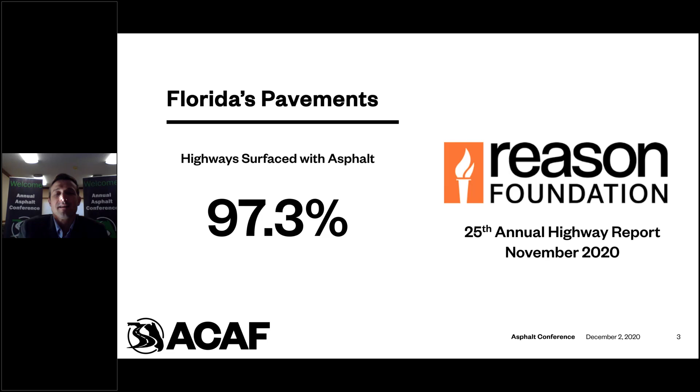The quality of our pavements, as we know, is good, but what's interesting is it's continuing to get better. I've sat down with the department and we've looked at data for the past several years, and the smoothness data continues to get smoother. The densities are getting better. So across the board, Florida's doing better.

The association for the past 40-something years has given out statewide pavement awards. This year, we got more applications than ever before. The application process for these awards is not easy. There's like a 10-page PDF you have to fill out perfectly. You have to do a lot of work and pay a sizable application fee. So to apply for this, you have to be fairly certain that your pavement's going to win.

That being said, we did look at the data, and this was by far the most competitive year we've had. A lot of the pavements that honestly didn't even make the final round of judgment would have won the statewide award in previous years.

Every year we give 3 statewide awards, and winning one of these is a huge accomplishment. The first one is for rural resurfacing. This is for state primary highway or rural county highway pavements. You have to have at least 10,000 tons or an equivalent measure. And to be a rural resurfacing project, 51% of the project needs to have paved shoulders.

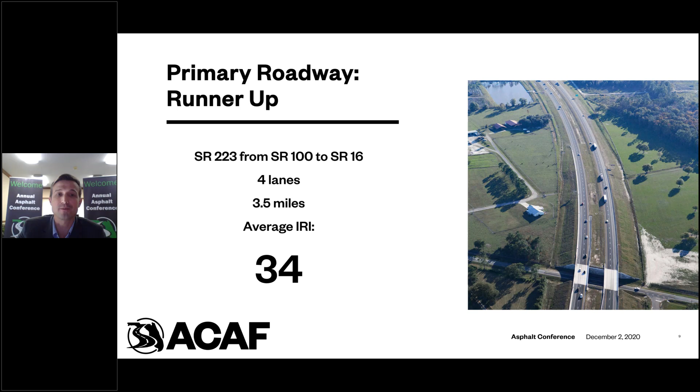Our runner-up in this category, and their picture is already on the screen, so hopefully some of you already know this is y'all. This was State Road 223 from State Road 100 to State Road 16, with an average IRI of 34. Anderson, Columbia, the powerhouse of North Florida, an IRI of 34 is really remarkable, so well done, Anderson.

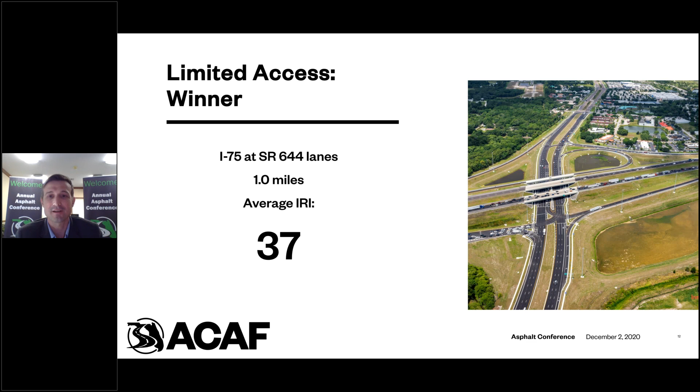And our limited access winner, I think this is a fairly recognizable picture for most of y'all in the audience. It's I-75 at State Road 64. It was 1 mile and 4 lanes with an average IRI of 37. So barely eclipsing Ranger, but it was our dear friends at Ajax Paving.

Anderson, Preferred, Ajax, and Ranger. Building smooth pavements helps the Florida asphalt industry, and that helps me personally. So thank you very much for the great work y'all have done.

One more award, and this award is different. It's not given out by the association, normally we physically give it out. It's awarded by the Asphalt Pavement Alliance, and it's for perpetual pavement.

Perpetual pavements to me are really remarkable feats of engineering from our asphalt engineers. Basically what they've done is they've taken these very difficult materials to control, rocks and binder and perhaps some additives, and arranged them in such a way that they can ensure that the distresses the pavement receives only happen in the top layers. So when you do have a crack, it's easy to mill off and replace.

And thus the pavement lasts forever. Asphalt is the only pavement that has this ability to be built for a perpetual life cycle, and it's a huge advantage to us in the industry and also to owners of the pavements.

This award is really tough to win. I will say Florida has won it 10 years in a row. The FDOT has to send a detailed application to the Asphalt Pavement Alliance. The project can't have any structural failures for the last 35 years and no more than 4 inches of overlay.

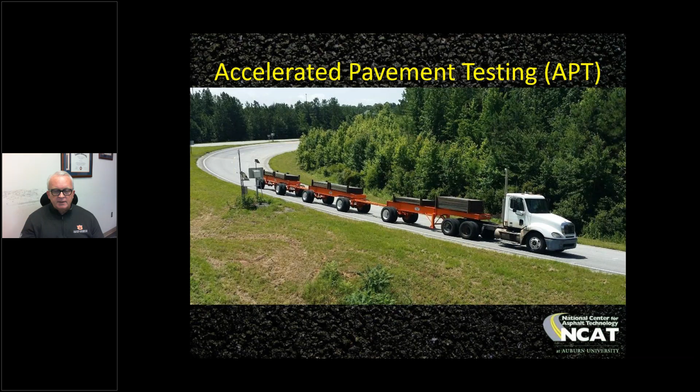We want as much equivalent single axle loading, realistic load level damage as we can get. So everything but the steer axles on that truck are loaded up to, but not beyond the federal limit. That gives us a gross weight that's about twice the legal limit, but we don't care about that.

That's a picture of the east curve of the track, where Florida has some test sections that are beyond the scope of the discussion today, but that research is ongoing in this cycle. We run 5 of these trucks at a time, so we run 2 shifts of drivers.

Each driver's goal is to run 200 laps. So each one of those 5 trucks does 400 laps a day, and we do that 5 days a week here. This is our type of accelerated pavement testing. It's a high-speed load event because it's an interstate simulation, and we use legal loads.

Now, we do research here. Florida DOT has been one of our sponsors going all the way back to the first research cycle here. And the research that we do at our track is essentially the high-speed, full-scale legal load companion testing that is, in many cases, done with the HVS test program that is run in Gainesville.

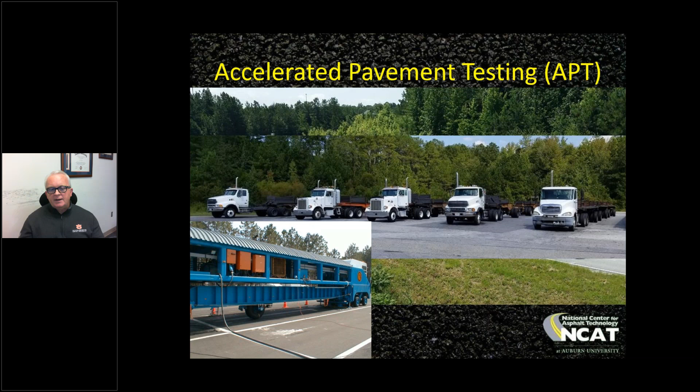So if you're curious about how it all fits together, we do our research in collaboration with the accelerated testing of a different type, that's the slower speed variety, typically a higher load variety, but the results are often compared to each other in order to provide the most value for the Florida Department of Transportation. Florida's actually been, as I said, one of our inaugural research partners here.

Florida's been very involved in the NCAT pavement test track, going all the way back to the planning stages in the late 1990s. So we very much appreciate and respect the relationship that we have with FDOT, and especially the practical aspect of the research program and the technical support that we are often blessed to be able to provide to our friends at FDOT.

Many of the northern states have joined in partnership with Florida because of a formal partnership that we have with Minnesota DOT in order to tap into the Minnesota Road Research Project. So a lot of the test sections that we build here at this facility, we build the same test sections now in offset years up in Minnesota. So we have the hot weather fatigue cracking test sections typically down here, and then we've got the cold climate thermal cracking, aggressive thermal cracking test sections that we also build in Minnesota.

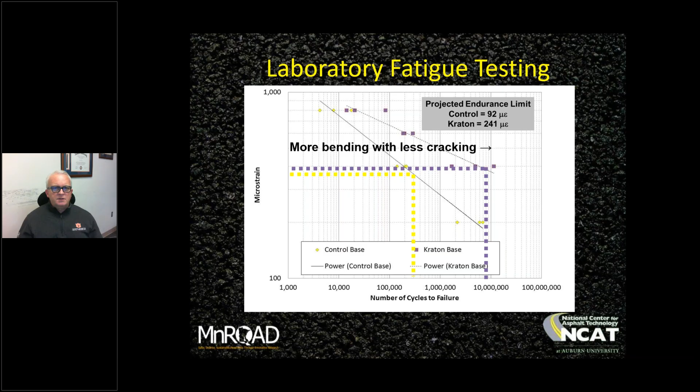So in the lab testing portion of this study, we knew we really had a winner in this material, and it was going to be extremely crack resistant as we installed it on the track.

So tremendous improvement in fatigue cracking performance, to the point where we were never able to fail the HiMA section on the track, even though it was 5 3/4 inches thick. We really think it had the potential to be a perpetual pavement had we left it on the track and studied it with enough ESALs, enough research cycles to prove that. It was on the track for 2 research cycles, and it never failed and never had any substantial distresses. So outstanding performance with HiMA binder.

What that translates to, very conservatively viewed, since we didn't fail the HiMA test section, is a layer coefficient at least 43% higher than the control section in this study compared to conventional hot mix asphalt. What that equates to, if you look at the differences in thicknesses, is 1 inch of HiMA mix is approximately equal to about 1 3/8 inches of conventional hot mix asphalt, with conventional, say, 7622 polymer modified binder as opposed to the highly polymer modified binder.

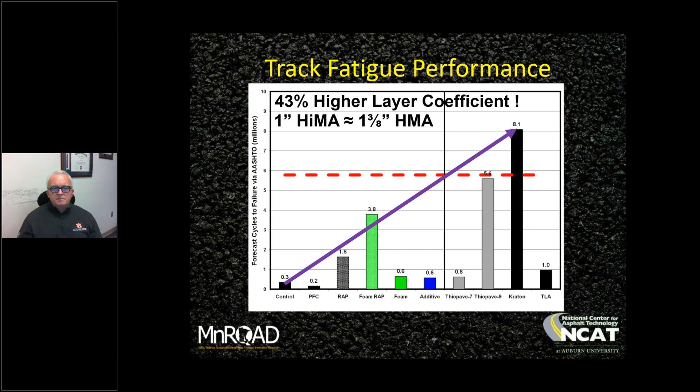So you get a huge benefit when you use these - at the time, this was a very innovative material.

When we saw that performance at 5 3/4 inches, we subsequently had another section on the track. On the far left, you see 10 inches of hot mix asphalt on top of a weak foundation, a simulation for Oklahoma. This was an Oklahoma test section, and at 10 inches that's not a perpetual pavement because the subgrade was so weak - highly plastic, very high PI type of material - and it actually started failing after about 8.5 million ESALs.

We did a conventional rehabilitation of that, and for the next research cycle - 3 inches of dense graded under 2 inches of SMA with a paving fabric in between - it failed again about 1/3 of the way through the research cycle.

So we had these HiMA study results that looked outstanding, looked perpetual, at 5 3/4 inches. We thought, let's try a mill and inlay of that buildup with a little tweak, taking the surface mix and building it as a rich bottom. We had a surface mix sandwich with 2% air voids at the bottom, and a base binder mix in the middle. We did a 5 3/4 inch inlay, and essentially floated a perpetual pavement on top of a completely failed pavement that had not previously survived, with a 5-inch mill and inlay with an SMA surface mix.

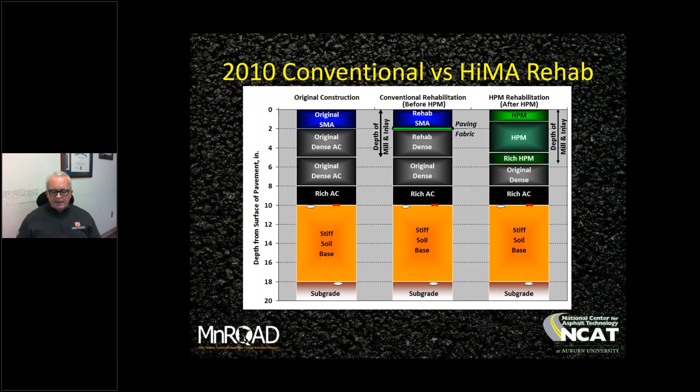That study was so successful that Oklahoma actually implemented this, and now it's been done numerous times on their network with great success. Because of the pooled fund research cooperative nature of our experiment, states started to pay attention when we saw that perpetual performance, and then saw that we salvaged a failed pavement with it.

So Alabama came to us and said, hey, do you think this HiMA binder would work here? The 2 big advantages you get from HiMA binder mixes are improved cracking performance and improved rutting performance, because of the elastic recovery potential that the mix has.

So we did a forensic study out at the project, looked at all their data, and said, you know what, we think this could work really well. Turned out to be an interesting project for Alabama. They did it as a night job because of the extreme traffic on this route. This was the first HiMA binder project in Alabama, way back in 2012.

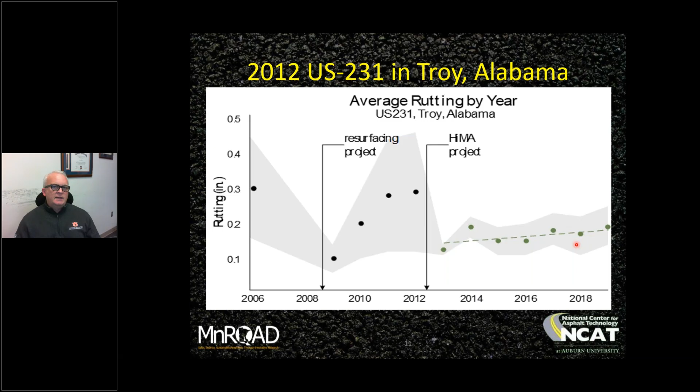As you can see, they're extremely pleased with the performance they've gotten from this HiMA mix that we put on US 231 in Troy on this project. Performance has been outstanding. If you want to learn more, you can look that up at ncat.us in our newsletter and download it.

So fast forward to the Green Group experiment on the track. It was also in 2012. We had 4 test sections in this experiment: a control section that was a relatively low RAP content mix, a ground tire rubber focused variant, a RAS focused variant, and a high RAP focused variant of the standard RAP control mix.

The idea was, can we use high percentages of reclaimed and recycled materials, consisting of RAP, RAS, and ground tire recycled rubber, to reduce construction costs and extend the life of the pavement.

The interesting thing about this is the high RAP focus section. I'm mentioning this because in the base layer, it had a 35% RAP dense graded mix design with HiMA binder. Up until this time, everything we'd done with HiMA had been with virgin mixes. Well, here we stepped out and said, okay, let's do something. We would allow in Alabama 35% RAP in a base and binder layer, so let's do that here.

But the problem was we had 35% RAP in the base with HiMA, 50% RAP in the intermediate layer, and then an SMA surface. So this 50% RAP intermediate layer was a relatively stiff layer because it had so much RAP in it, and we didn't use a softer binder or a recycling agent or anything. It was straight 6722 neat asphalt, so there wasn't a lot of rock interlock between the base layer and the binder layer in that buildup.

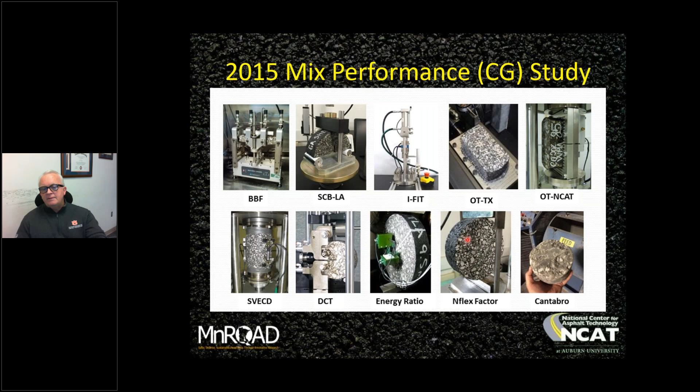Since we were building a bunch of sections, it was more like a regular road. When you throw weekends in there and then rain delays, we actually had some difficulty getting the binder out of our storage tank, and that was more like what a contractor could experience on a real project. So that's one of the things you have to be cautious about when you're engaging in work with this material. But we really believe in it and the performance of it, and we've used it again numerous times on the track.

That brings us up to 2018, and the state of South Carolina is funding research to do full depth rapid rebuilds. In their test section we went 8 inches, a little over 8 inches I think, in a single pass. And in their section, it was placed with conventional binder.

But to practice for that, we did 2 other test sections that we built with HiMA binder. We did 8 inches in a single pass with HiMA binder, and we had no trouble getting compaction, production handling, placement, compaction. We did cores so we could look at how density varied over depth, and density was great from the top to the bottom.

In the other 2 sections where we put thin lay surfaces on, those were a little over 7 inches, so not quite as deep as the section we did for South Carolina. South Carolina's idea with this research is: can we take an interstate that's completely failed and do a full depth rapid rebuild, in 1,000 and 2,000 foot pieces, without a big drop off and without having to do stage construction, so we can open it to full traffic the next morning. We've done that with diamond grinding for smoothness.

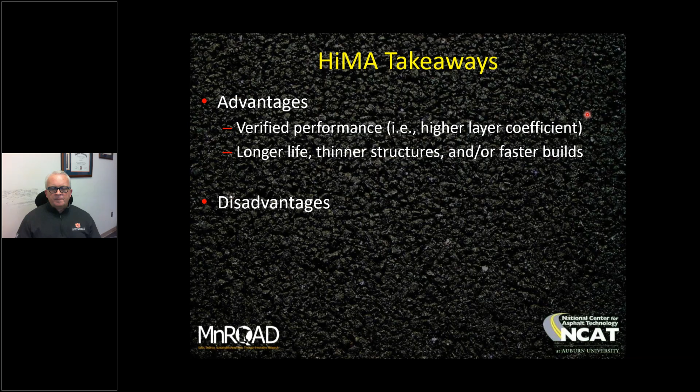On the advantages side, we've got verified performance. We've actually been able to calculate a higher layer coefficient and improve structural performance. That's outstanding. You get better rutting performance and better cracking performance, and we have that very well documented now. You get longer life, thinner structures, and or faster builds. There are a lot of advantages to getting the structural performance from 1 inch that would take 1 3/8 inches with other mix.

During production, construction, placement and compaction, it behaves similar to conventional polymer modified binder, as long as you respect the shelf life and storage temperature, and don't drag your feet during compaction, because when this stuff cools down and sets, you're not going to get any more density on it. But it's no different compacting than conventional 7622 up to that point.

On the disadvantages side, you do have limited time to use it after formulation. That's not delivery time—again, maybe you need to talk to your supplier, maybe there have been improvements in the chemistry, but the last time I used HiMA binder, I was essentially assured I had 5 days of low viscosity usage from the time it was formulated.

So if you think you're saving time by not ordering the load, you need to know when that load was formulated or blended at the terminal, because they may have had it sitting in a storage tank, and the clock is ticking on the shear softening package that allows it to be as workable as conventional 7622. If you're plant personnel, this is really important—if you tell them this stuff has 3 times the polymer but isn't supposed to be any harder to work with than 7622, they'll be tempted to crank up the heat in the storage tank and or in the mix. When you put more heat on this binder, unless there have been chemical package changes, it shortens that 5-day window.

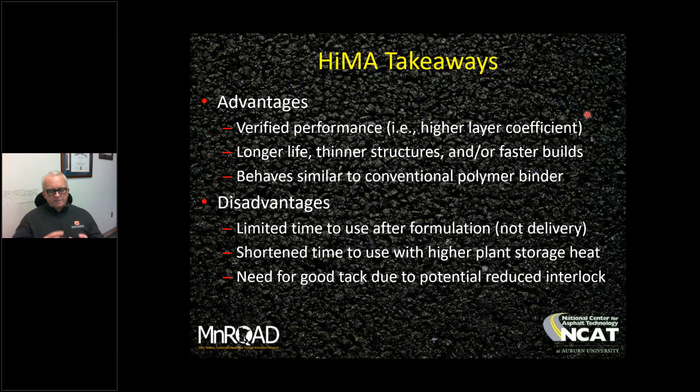And as I mentioned in that 2012 Greene Group experiment, another caution is you need to make sure you got good tack, because this is a tough mix. You can have the potential for less interlock of the aggregates for the layer that you're compacting and putting down on top of. So you can have essentially a cleaner, more defined layer interface. And when you have that, you need to make sure you got good tack.

So when we did that forensic study, we found that we needed twice the specification, the mid-specification target range, because we built a textbook perfect test section, and we needed twice the tack in order to optimize the bond strength. And when we did that, we prevented a recurrence of the failure, and it went from the worst performer to the best performer.

So I'm going to change gears now and talk about aramid fiber. We've used aramid fiber in several different ways on the track, starting with an effort that Alabama undertook to make their OGFCs tougher. We've looked at treating stored mix with aramid fibers, run maintenance mix with and without aramid fibers, did a field project in Georgia comparing a neat asphalt aramid fiber modified to an SBS polymer 76-22 modified mix, and now we're using aramid fibers this fall in phase 1 studies in preparation for the 2021 track. So I'm going to talk briefly about these different uses.

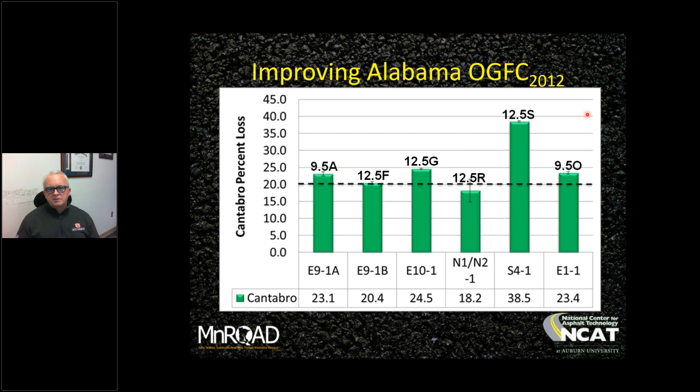So based on what we saw there, we said, let's pull some dense graded mix out of storage in buckets and use this little trailer mixer that we had to see if we can add fibers to it after the fact and see what kind of numbers we get. Well, we tried to do that. I think we had some dispersion issues and we were not able to see the benefit of the fibers in the laboratory.

When we ran maintenance mix on the track with it, it's really easy to experiment with this if you're a contractor, because you can just put somebody on the belt, put paint marks on the belt, and throw a bag up there so that you get the necessary 1 pound per ton. You got to make sure you have a plant that's going to give you good dispersion. We're blessed—we have an Astec double barrel plant here that we've been using going all the way back to 2003, so for the last 17 years on the track, and the times that we've used the fiber, we have gotten good dispersion with our Astec double barrel plant. But you need to make sure that just throwing it on the belt, you do get good dispersion. Now there are automated feed systems that do a really good job of ensuring that.

This is what our maintenance patching looked like. If you look at this, we had conventional 76 on the near end of that wheel path patch, and then fiber modified on the far end. When I put this patch in—and we do this a lot on the track, so keep it in mind as you hear people talk about things that we've learned here—

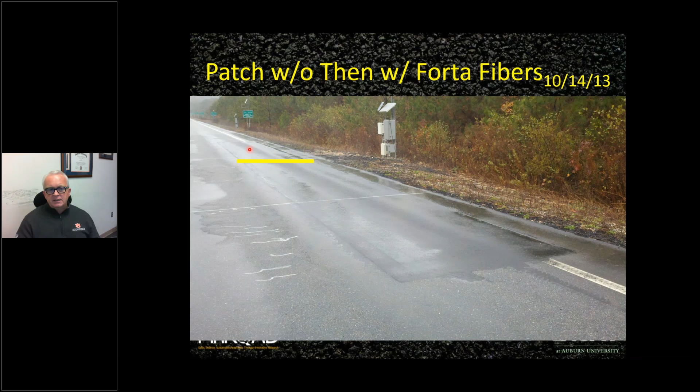this patch was higher, the distresses were higher severity on the far end. This wheel path, as you can see with these transverse cracks, was a pavement that had completely failed in fatigue in this outside wheel path, and the higher severity level fatigue cracking was on the far end. So that's where we put the fiber. This is conventional mix, and the far end down here is fiber reinforced mix. This is after the cracking started to reflect. So we eventually had much higher level severity reflection cracking in the conventional mix than we had in the fiber mix.

Again, not a statistically valid study, just really anecdotal experiences with maintenance patching that we did, but this was encouraging to me because this was a pavement that had failed previously in fatigue.

From there, we went to a field project that we did. This was an off-track small project using our automated distress equipment. In this project, some conventional polymer modified mix was compared to neat asphalt fiber modified mix. The bottom line is we saw no statistically significant difference between the polymer mix and the neat asphalt fiber modified mix in rutting or cracking. So there were not statistically significant differences. Again, it was just a project where we went out with our distress collection equipment and documented this. This project was actually for the Forta fibers.

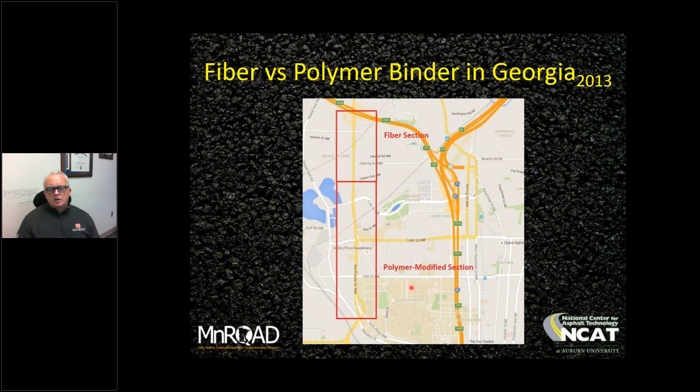So again, the aramid fiber takeaways in terms of advantages and disadvantages. It's really easy to stop and start this when you have a plant that's going to give you good dispersion, and that would make it appealing to me if I was a city engineer or a county engineer. Maybe this is something that if it works, you use it in intersections, or if it can be proven in the lab to influence balanced mix design results, maybe you can use it to tweak your production BMD numbers if the agency is requiring those. At least it has the potential for that if the data proves out.

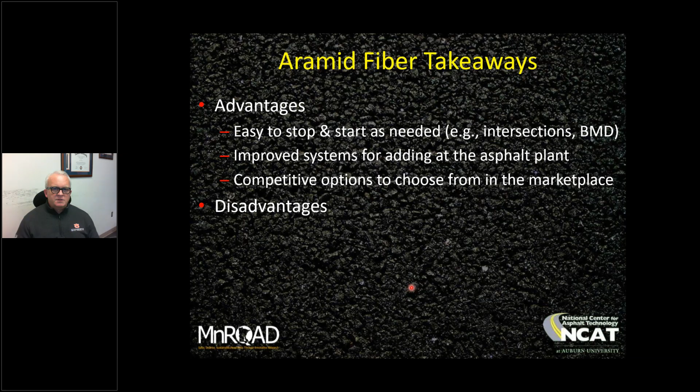Now they have improved systems for adding this material at the asphalt plant, so it can give you really good dispersion with the right equipment, regardless of the plant type that you have. And now there are some competitive options to choose from in the marketplace. I came from Alabama DOT, and I understand the desire that agencies have to not use proprietary technologies. Well, there's some competition out there now that may address those concerns if the agency had those concerns.

Disadvantages: dispersion is critical for performance improvement. If you look at the bag of fibers or the larger bales of fibers, what you see is not kind of the meat of the product. The actual aramid fibers make up a relatively small percentage of the product that you see. So you got to get that dispersed so that you can fully actuate it, for lack of a better word. Kind of think of it like if you're doing some maintenance work at your house, building a fence or something, and you're using sacks of fiber reinforced concrete, fibercrete. When that stuff's all clumped together, it's not going in areas where it's clumped. You're not going to get good performance in areas where there are no fibers, and that's going to happen because it's all clumped together. So you got to have good dispersion with this product.

Likewise, this is a big thing. It is difficult to prove the benefit that you get from aramid fibers in the laboratory, and I think the reason for that is because it is a really strong fiber reinforcement, and you have to mobilize the fibers in order to prove the benefit. So that is a concern that some of us have, that maybe our BMD tests, the really simplified tests that are highly implementable, maybe they don't capture the benefit of that. And also the laboratory dispersion is harder to do in the laboratory. You really got to know what you're doing in order to get this stuff dispersed, and then have a good simulation event in order to see the benefit.

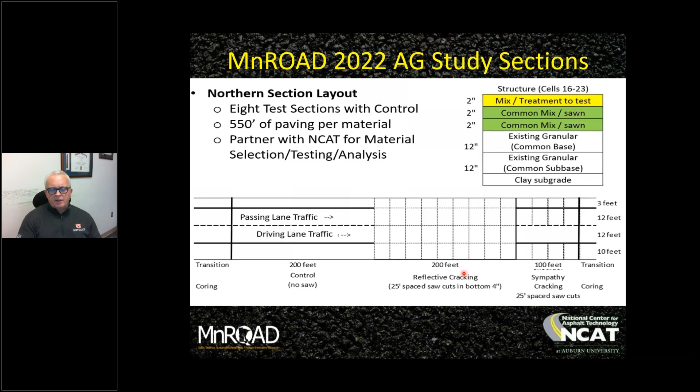And then for 100 feet, we're going to be looking for sympathy cracking. Sympathy cracking up there is when they just mill and inlay the main line, the paved lane, but they leave the shoulders, and those shoulders can have really aggressive thermal cracks that work their way out into the lane that's been paved relatively quickly. So we're going to look for cracking, measure cracking with a thermal focus in these three ways in our Minnesota test sections.

So we're hosting our end of cycle conference June 22nd through the 24th of next year. Please note that if you plan to attend, it's open to anybody. We moved it back from April to June based on everything we were hearing from the CDC and the FDA on when vaccines are going to be available to everybody. We think everybody's going to be able to travel in June. That's as good a guess as we can get right now.

Immediately coming out of the conference, we'll be rebuilding the additive group sections and all the other test sections that we'll have on the new track. So please mark that on your calendar, and we'd love for you to participate. There will be an online option because with the 30 states now in the NCAT and Minnesota partnership, there's still going to be some states that can't travel, so we're going to support them in the best possible way.

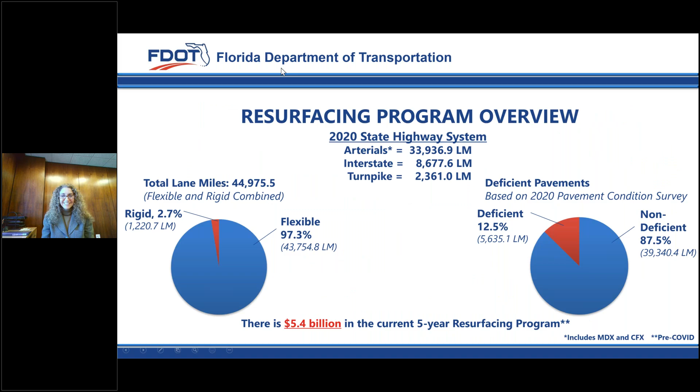Next slide. I'm seeing a message that says there's technical issues. Sorry, I apologize, we lost connection here for a second. This is the slide we want. Oh, there you go, that's the one. Right, yep, that's where you are. Thank you, no problem. Hey, we're all working through this all together, right?

Last year, my understanding is that Courtney Drummond spoke with you all, and he actually mentioned the M-CORES program, and I just wanted to give you a quick update. The M-CORES task forces held their final meeting the week of October 19th. They've completed their reports, and those reports have been submitted to the governor's office and the legislature as of November 12th. The task force's charge was to provide recommendations for how the department could work with local governments and other agencies to carry out the M-CORES program as specified in statute.

The recommendations address how the needs and feasibility should be evaluated and how corridor development and related activities should move forward. The task forces provided recommendations in 4 key areas. The first is high-level needs in each study area as related to the 6 statutory purposes outlined. The task forces determined there were no specific needs for new greenfield corridors or modifications to any existing facilities through the study area based on information currently available. Project level needs will continue to be evaluated as we move into future phases.

The task forces also recommended a set of guiding principles or core values to support decision-making related to each study area. The task forces had robust discussions on key topics, including how to locate and manage lands around interchanges and how to protect conservation lands and habitat. The task forces recommended instructions for project development and beyond, and ensured that those guiding activities for each study area would be maintained.

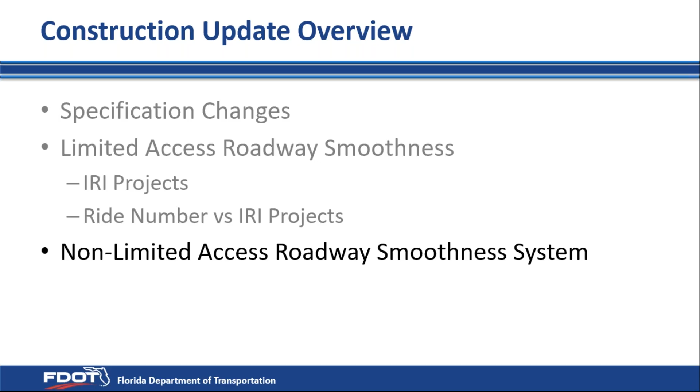Today I've been asked to provide a construction update, and I'll talk a little bit about a couple specification changes. I'll also speak about limited access roadway smoothness, covering the IRI projects, the incentive projects, and a comparison of the ride number projects versus the IRI incentive projects. I'll also talk about our non-limited access, or primary road, smoothness system currently being developed with the Smoothness Committee, and wrap up with some words on e-ticketing and implementing changes.

As far as the specification changes go, Howie Moseley will cover most of them in his presentation, but I wanted to cover two closely related to construction. One is in section 327, where we're adding section 3.11, which will allow traffic on a milled surface for up to 3 days before paving is required. This has been submitted for the July 2021 workbook and is going through internal and industry review. It will allow, upon engineer approval, a milled surface to stay open for 3 days before paving, provided there are continuous longitudinal milling striations, no drop-off or safety issues, and no drainage issues. If those requirements aren't met, we'll revert back to paving the day after the surface is milled.

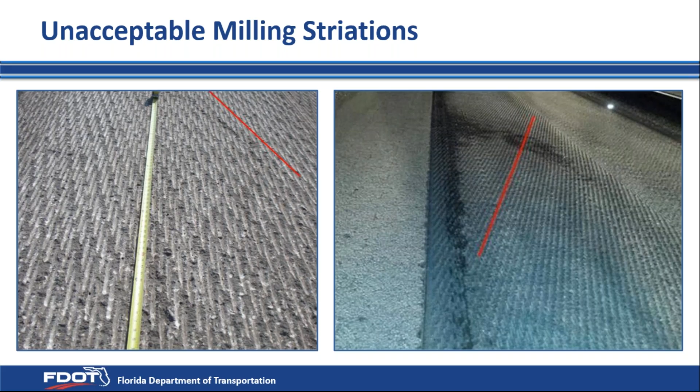The specs and this presentation include a link showing photos of acceptable and unacceptable striations, some side by side, and some individual photos. We're looking for continuous longitudinal striations, and we don't want gaps that create chevrons, which create issues for the traveling public—particularly motorcyclists and drivers going through construction areas with barrier walls nearby, which can pull them side to side.

Another spec change is in 330 and 334. Raised crosswalks and speed tables are being added to the straight edge testing exceptions in 330-9.4.5.2. We'll still have the 3/8 inch deficiency requirement for objectionable areas in case there's poor paving in those areas. Raised crosswalks and speed tables have also been added to the density testing exceptions in 334-5.1.2.

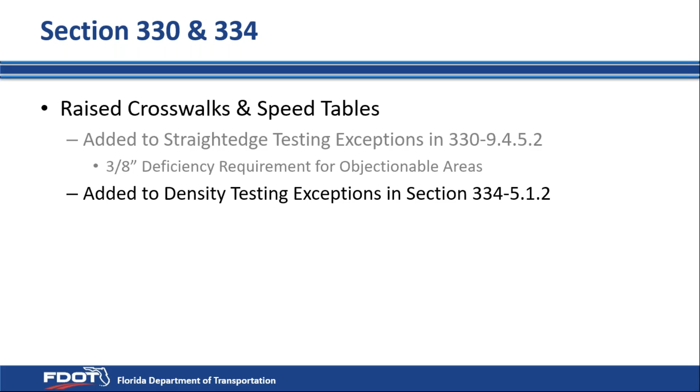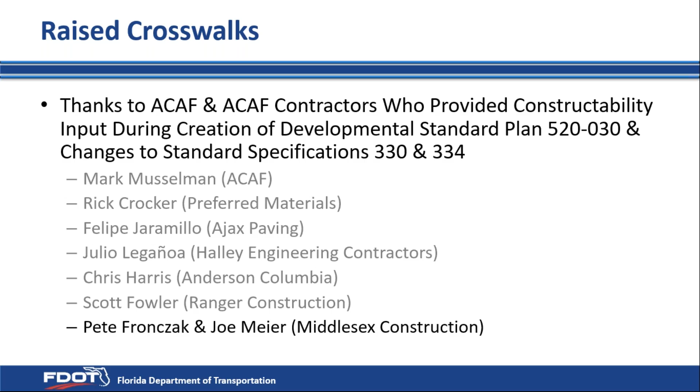As far as the raised crosswalks go, I want to thank ACAF and the ACAF contractors who provided constructability input during the creation of Developmental Standard Plan 520-030, as well as changes to standard specs 330 and 334. Those folks were Mark Musselman of ACAF, Rick Crocker of Preferred Materials, Felipe Jaramillo of Ajax Paving, Julio Legañoa of Halley Engineering Contractors, Chris Harris of Anderson Columbia, Scott Fowler of Ranger Construction, and Pete Fronczak and Joe Meier of Middlesex Construction. Thanks again for providing that constructability input—I think it's great to have contractor input in the design process, which helps produce much better designs on our construction projects.

In 2019, we had 6 incentive projects. The net incentive was almost $84,000. The IRI average was 43, which was better than the interstate data used to create the spec, which had an IRI average of 48.

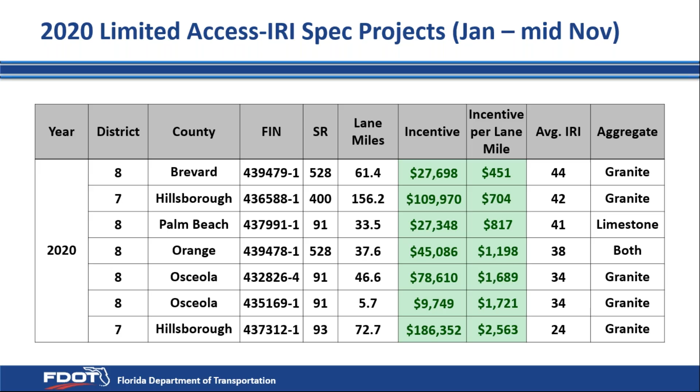There's the projects listed right there—mostly granite, but also some limestone projects. Overall, 7 projects. The lowest average project IRI was 24 inches per mile, which is actually a new state record—congratulations to Preferred Materials, who paved that project. The highest average project IRI was 44 inches per mile.

All 7 projects received incentives. One project received the consistency incentive, and the average incentive was $1,050 per lane mile. Total incentives again were $353,382, and that total does not include the project-wide consistency incentive paid on that one project, so it was even more as a total.

To summarize these almost 3 full years: 16 out of 17 projects received incentives, and all limestone projects received incentives. Total net incentives paid was just over $500,000. The smoothness incentive spec is a positive, in my opinion, and in a lot of contractors' opinions too. It provides incentives for smooth paving, and it's giving us smoother asphalt pavements than we've had before. We're starting out with very smooth pavements to begin with, so we're moving in a positive direction.

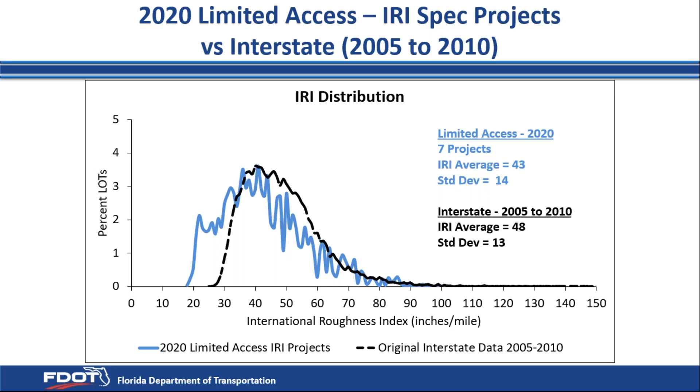So for the IRI incentive-disincentive spec projects, they've been paved smoother than projects with the ride number spec. Those incentive-disincentive projects incentivize contractors to pave smoother, and those incentives are benefiting contractors, FDOT, and the traveling public.

Next I'll talk about the non-limited access roadway smoothness system, or the primary road smoothness system, and that's something the smoothness committee is currently working on. We're writing developmental smoothness specifications, and those are for the non-limited access roads, also known as the primary roads.

That's for design speeds 55 miles an hour and greater. It's the roadways that are currently laser tested, but use the ride number. It's going to be an IRI-based smoothness specification, and we'll have smoothness incentives and disincentives.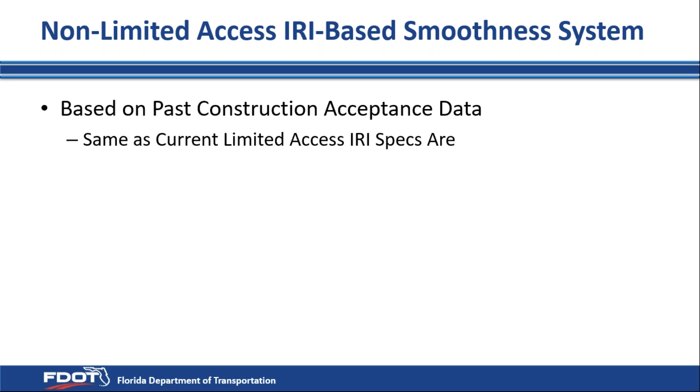It's going to be based on past construction acceptance data, and that's the same as the current limited access IRI specs that we currently have in place.

However, we're going to split it into multiple classes, and what that's going to do is account for the level of ease or difficulty in order to pave smoothly. So we have a pretty good range of types of projects on these non-limited access projects. Some are in rural locations, some are in very urban locations.

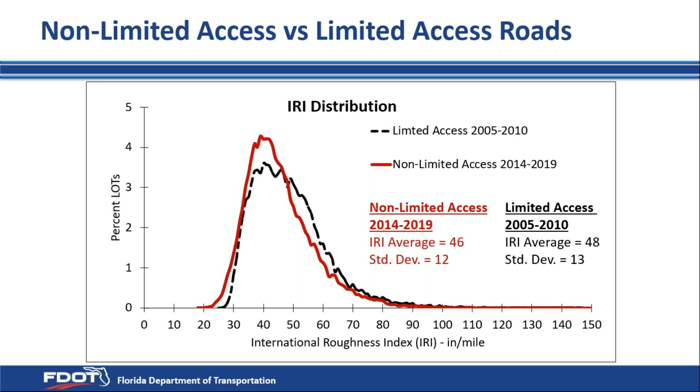And so we actually have 3 classes, class 3, class 4, and class 5, that have higher IRI limits, so allow a little bit rougher pavement based on the different situations that are encountered in these types of projects.

And there's one class that has a little bit lower IRI limits. However, we did not lower the remove-replace limit. We kept that at 95. So it'll be a little bit tougher, or lower IRIs needed to get full pay or incentives, but these projects show that contractors can pave them smoother.

Class 5, there's very little pavement that's in the Class 5 range, but some of those very short projects had some very high IRI numbers, so we wanted to set up a class for those. But most of the projects are going to be in the Class 1, Class 2, and Class 3 pavement areas.

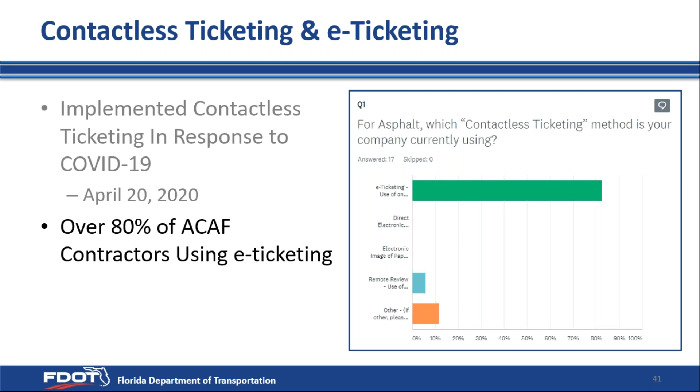Some of the advantages that I know I've spoken about before, and I've also heard from contractors recently, are advanced mix and truckload information, better project tracking, increased oversight. You can view paving progress on multiple projects by phone, tablet, or computer. Fleet management's another advantage, and also just having that electronic data in one location helps a great deal for a lot of the processes in paving, and especially payment.

So we pretty much had very few problems that I heard of. Typically most folks are going to call me when there's problems on the construction side. I think that's outstanding considering the immediate statewide implementation that occurred. I just wanted to thank the contractors, the e-ticketing vendors, the CEIs, and the FDOT personnel who made statewide asphalt e-ticketing implementation successful.

Just wanted to say, let's continue working together to quickly implement changes that benefit asphalt contractors and DOT, regardless of how challenging or risky that change might appear at first. I know with e-ticketing, there were a lot of concerns on how that was going to occur when we first started talking about it, and especially when we were talking about implementing it in response to COVID. I think both sides, contractors and DOT alike, were reasonable in how we tried to implement it, and I think both sides are also finding a lot of benefits from it.

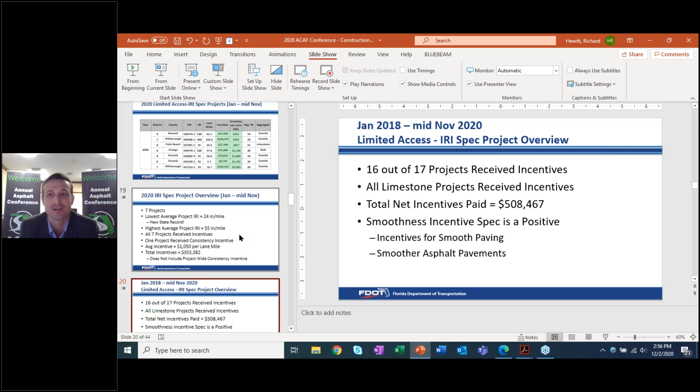Absolutely. I want to say, and I've alluded to this before, how great I think the smoothness incentive specs are, because they're good for the taxpayer - we're getting a smoother pavement that's going to cause the traveling public to spend less money on maintenance and fuel. It's good for the department because they get roads that will last longer, and it's good for the contractor because they get a payout in the form of cold hard cash. So I commend you for your work on this. It's a win-win-win.

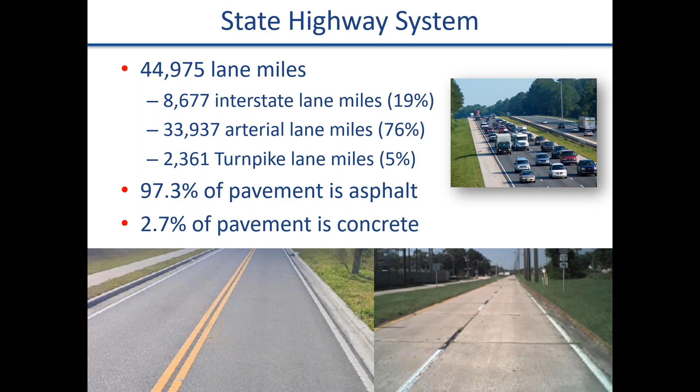Data you haven't seen yet today: just over half of our asphalt surfaces are dense graded, 50.4% by lane mile, and 49.6% of the asphalt surfaces on the department system are open graded. I think that statistic kind of catches people off guard at first, but it is a 50-50 split between the two friction course types, dense and open graded, in the state.

Asphalt producers in Florida: we've got 97 asphalt plants in state approved for DOT work, and 2 out of state. 38 in-state asphalt contractors approved for work, 2 out of state. 15 approved binder terminals in the state and another 10 out of state, and then approved asphalt emulsion terminals, we've got 5 in state and then 8 more that are out of state supplying emulsion for Florida.

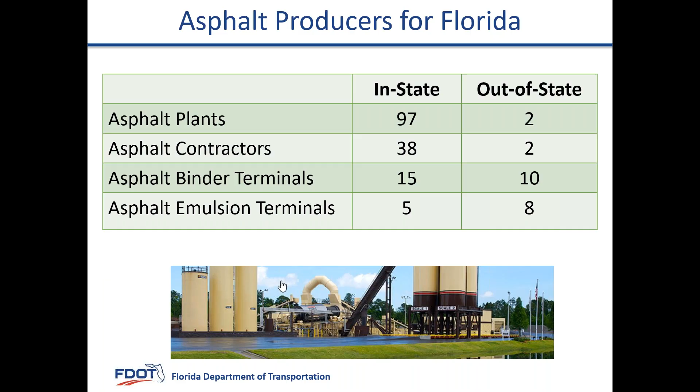Asphalt mix tonnages, and again these stats are going to be for the fiscal year. So the stats I'm showing are from July 1st, 2019 to June 30th, 2020. That's just the way we've always done it, and we're not going to change now, even with COVID. So you can see we did almost 4.5 million total tons of asphalt this past fiscal year.

You can see the breakdown by mix type. And like I showed earlier, you can see the FC5 is almost as much as the combined dense graded friction courses, just a little less, 500,000 tons of FC5 and just a little bit more of FC12.5 and FC9.5, even though they're thicker. You can see there was a little over 1 million tons of friction course total placed, and then the rest was the structural and base courses, of which the predominant choice has been the SP12.5 millimeter, and it's like that every year.

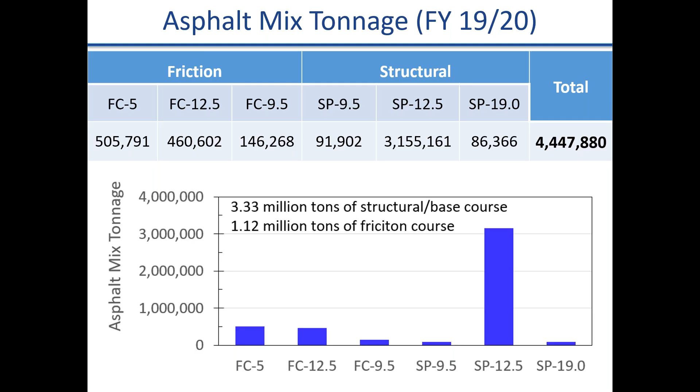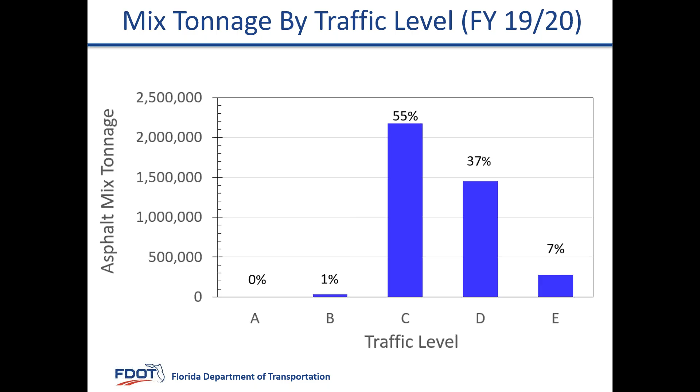Mix tonnage by traffic level, and again this is the actual traffic level of the mix design that was placed. Clearly, we have more than 1% of our system being traffic level A and traffic level B roadways, but most contractors take advantage of the ability to substitute up one mix design level on traffic level. And you can see over half the mix produced was traffic level C, then traffic level D being 37%, and 7% was E. So since we've been allowing the substitutions one traffic level up, the breakdown is usually something like that.

Mix tonnage by binder type. We show this every year, and again, as it has been for the past several years, the predominant binder used in the state of Florida is PG76-22.

It's really helped improve the performance of our mixture since we introduced it in the early 2000s, and you can see we've really transitioned it from being kind of a novelty binder to the backbone binder of our system. You can see the percentage of different neat binders depending on the percentage of RAP contractors used over on the left side of this graph.

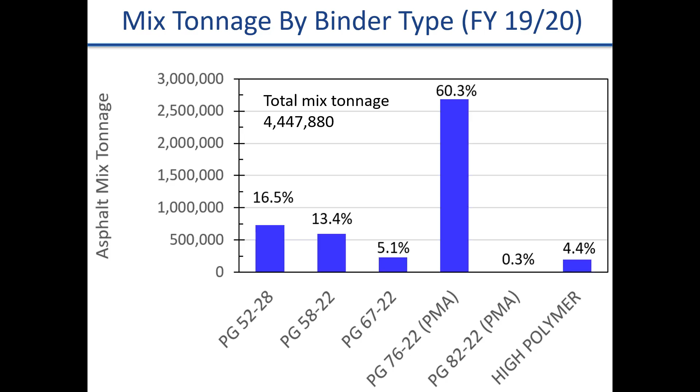Again, 8222 is no longer in our specs. Just got a couple of projects out there left that still have it on the books, so we had a little bit of 8222 last year. High polymer binder made up 4.4% of the mixed tonnage last year. Again, I'm using it where we really need the top quality binders. You guys heard Buzz talk about the performance improvements it gives. We're using it where the engineering makes sense to use it.

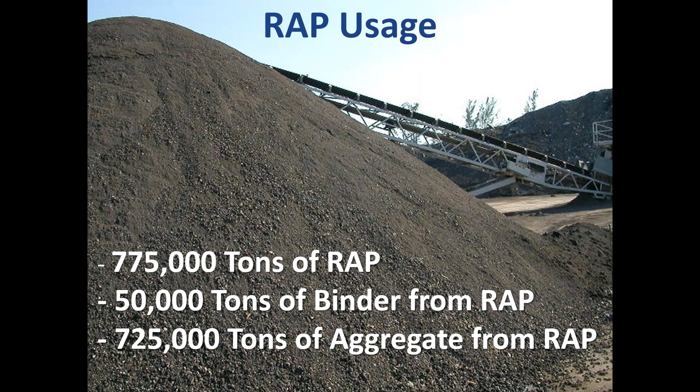And you can see the other percentages are about the same. RAP usage in Florida last year, again these are estimated quantities as good as we can get, mining the data out of MAC, but we used 775,000 tons of RAP, which was roughly 50,000 tons of binder coming from the RAP, and then the other 725,000 tons would be the aggregate in the RAP. Again, RAP is a great sustainable material, and the contractors in Florida do a great job of recycling the old roadways back into our system.

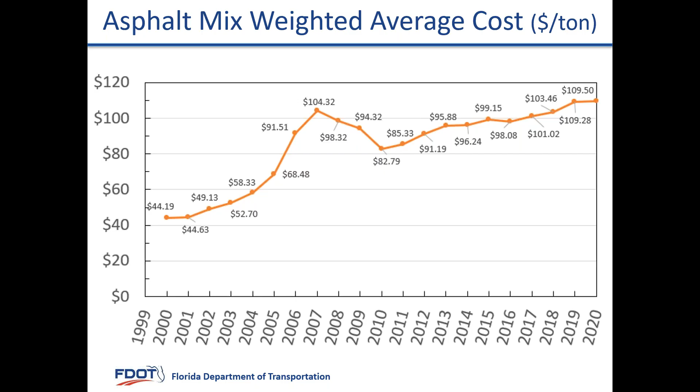Again, I want to go ahead and give the 2021 high polymer binder forecast. I'm going to take my time on this slide, so you guys that really want this information can get your Snagit tool or your camera out and take a picture of the slide. It's a little different this year. We've pushed some projects just a little bit. So the 3 projects highlighted in yellow, I actually showed last year as forecasted for 2020. Those let dates have moved.

So you can see total high polymer binder forecast for next year is 167,000 tons, but more than 70,000 tons of that is actually a holdover from the previous year where the let date shifted. For the 2 projects up top there in Duval and Osceola County, the let date only shifted by a month, from December to January. The big project there in Marion County, that's got a lot of high polymer on it, shifted I think from October or November into May of 2021. There's a lot of high binder on that project.

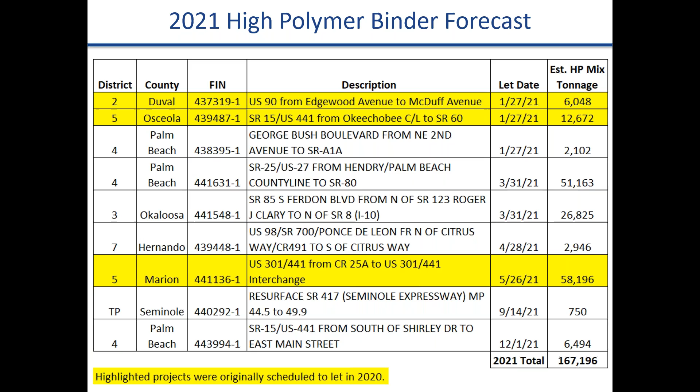That project gets a lot of truck traffic and has some fatigue cracking, which is why we're using high polymer there to take advantage of the benefits discussed earlier. We've got full depth alligator cracking, so we're going to mill it all out and put it back with high polymer to make sure it doesn't come back again. That's a lot of quality in the high polymer binder, and it'll really help with constructability on that project.

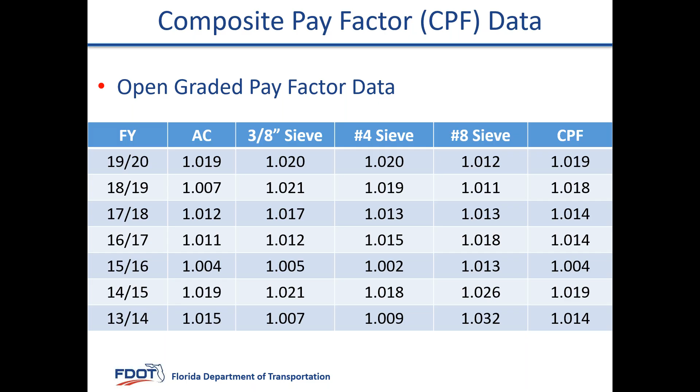Open graded pay factor data was just a touch over 1.018, at 1.019 average for all the FC5 mixtures. There's roughly about a 2% bonus on each pay factor, a little less for the 8 sieve, but you guys never care about the 8 sieve much anyway. No, good job overall, good quality on the FC5 mixtures.

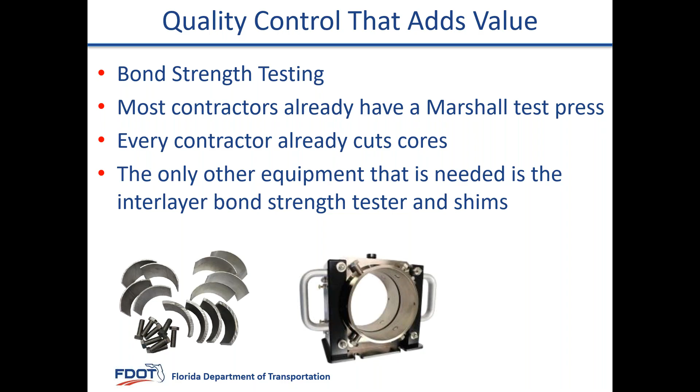One of those off-the-counter units is less than $5,000 - I bought one for the state last time. So it's not a lot of money, and you're already doing everything else you need to do for this test, and you've already got a guy in the lab anyway.

The idea is you'd use those test results for your informational purposes. We've used the bond strength test for forensic evaluations and to address issues when there's bond questions or spec violations. You would have the equipment and use it as you see best fit. It's not going to hurt you.

But what it will do is help you assess the effectiveness of your paving operations and minimize potential warranty issues. Back when I was in the district, one of the top warranty issues I saw was slippage. It happens after the project's final acceptance, and mobilizing one time to fix slippage will pay for the equipment you need to run the test. You don't have to add this, it's optional, but it's a great tool to assess your level of quality and minimize warranty issues.

If you're interested, you're welcome to call myself, Greg, or Wayne to talk more about the test. The test method that governs the procedure is listed there, with a link if you're interested - it's on our website. Again, it's effective quality control you can do that's only going to benefit you and your operations.

The other one I want to talk about is even simpler because you've already got all the equipment you need. Thankfully this year I haven't heard a lot about end-of-load segregation - knocking on my wooden desk here. I'm hoping I'm not about to jinx us, but the weather's getting cold again, and that's when segregation usually crops up.

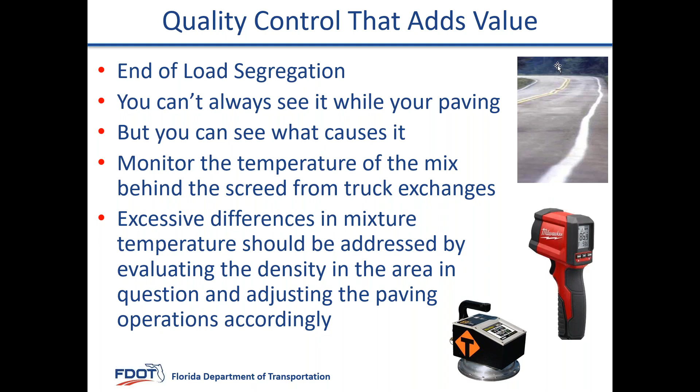Shifting gears, we'll talk some more about pavement performance - Mark and Stacy both covered that, so I ought to give you a quiz on this too. Like Stacy said, we've got a statutory requirement to ensure 80% of our system meets department standards and is not deficient. We've had some other internal goals - that was a good question Mark asked.

We've had different internal goals over the years; right now, this is our requirement. You can see after this past year's survey, we've got a deficiency percentage of only 12.5% overall, and as usual the predominant distress is cracking. Keep in mind that cracking rating includes both cracking and raveling - those are the two that are visually assessed. At some point those will be automatically assessed just like rut and ride, but for now they're still visual assessments, and they are our predominant distress.

We've got very good smooth roads, with only 1.3% of our system considered deficient with respect to smoothness, and very happily only 0.3% of our system is deficient with respect to rutting. Rutting is a safety hazard, while ride gets the driving public upset. So when your distress is primarily cracking - and most of ours is either raveling or top-down cracking - that's where you want to be. That's easy to fix, and it doesn't cause a safety hazard for the most part.

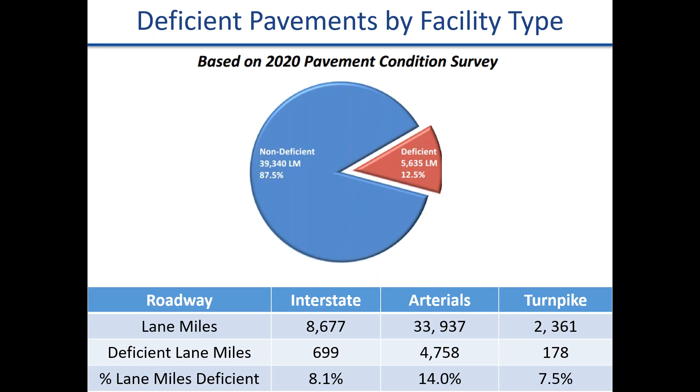You've got the overall deficiency shown by this blue line that grows across. The red line is where we don't want to be, where we're statutorily deficient, being over 20%. But these little light blue bars show the number of lane miles that were resurfaced over the past year.

The takeaway is, look, we're doing less resurfacing, and yet we're still maintaining the system. And again, that's a credit to everybody, but especially the contractors. You're giving us a good product, and that's critical. That allows us to do more capacity and still provide a very good system.

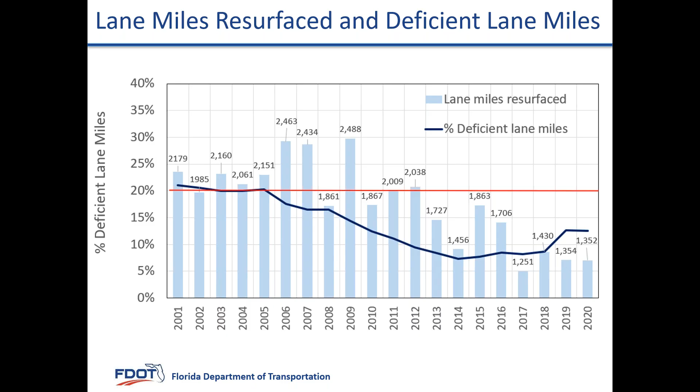I went out west not too long ago. I drove through a lot of states, and not one came close to the quality of our roads in Florida. So we're doing an outstanding job.

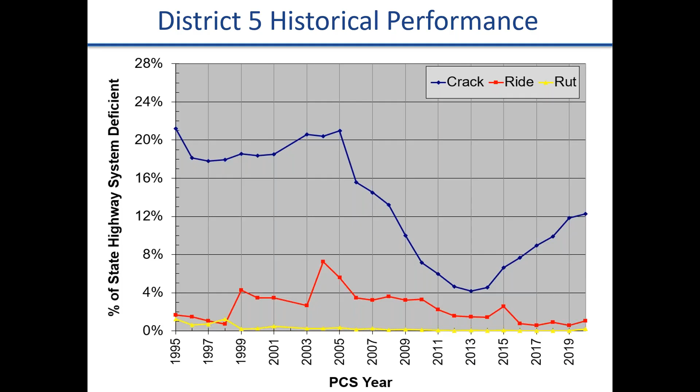District 3 is a little high there too, but doing all right. District 4 is in really good shape, doing really well. Again, more of an urban district, the ride's a little higher, but that makes sense when you've got more of an urban environment. District 5 is very similar to some of the other more rural districts—a little higher in cracking, but really good on rut and ride.

District 6 is kind of the oddball because it's very urbanized down there, and so it's the only district where we've got more roadways deficient with respect to ride than to cracking or rutting. But again, both low, and it's just the nature of how urban that district is. District 7 looks more like some of the other districts. And the Turnpike has really got it going in the right direction—they were a little high last year, but they've turned it around really well and are trending in the right direction.

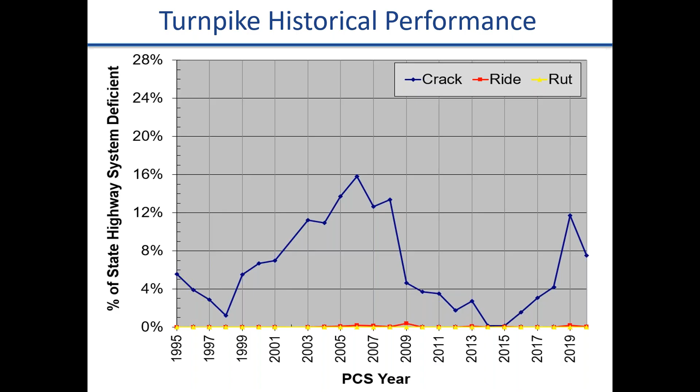Okay, shifting gears, I'm going to do some spec updates. What I'm looking for most in our updates is a better colored book. We've got this garnet and gold book for January 2021—hopefully we'll see an orange and blue book again for the next one. But anyway, we'll go through spec updates for the last couple of cycles and then also briefly highlight the specs currently out for industry review that are proposed for the July 2021 book.

In the July 2020 workbook, the big change with respect to asphalt, I won't hit the minor ones, was the increased allowable maximum lift thickness for the type SP 12.5 structural course mixes. I think that's a really big benefit—we've talked about it before, allowing up to a 3-inch lift. You give us density, smoothness, texture, and cross slope, and 3 inches in one pull—that's great, so it really allows for faster construction. A lot of our system, a lot of times on the interstates or rural highways, you're doing a 3-inch SP layer and then FC5 on top; this allows you to do that in one pass. That was the only major change for July 2020.

For the January 2021 workbook, the stuff that goes in place next month for everything let after January 1st: the first big change in the base spec is that type SP 19 millimeter mixes will be allowed for use as base. That's new—there was a lot of compelling arguments for that. We've got a little bit of a safeguard in there since it is a new item; we'll talk about that, but I'm excited to have that versatility for contractors who want to use it. We've also got new allowable layer thicknesses for base courses—I think it's optional base group 9 or 10-1, don't quote me, is 6.5 inches.

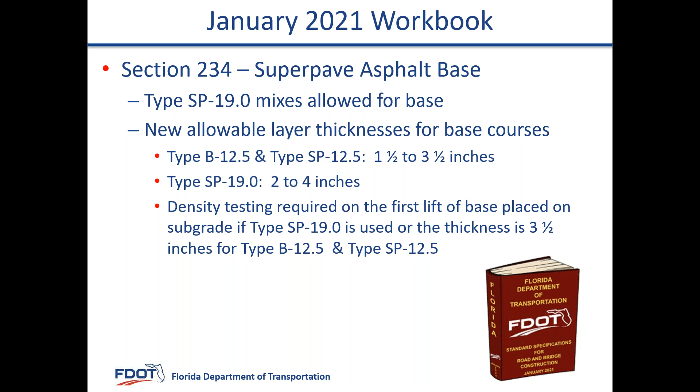So, updates to the January 21 workbook for 334. We updated some of the requirements for continuous RAP stockpiles, just being a little more clear what's expected, worked with the industry on that to get that in.

The big one, or one of the big ones, is the increased allowable RAP usage up to 30% for structural courses containing the 76-22 binder. Again, we're going to characterize the RAP based on the percent passing the 16 sieve and the high PG grade to see if that's allowable or not. I'm going to talk more about that during the research section. But again, that's a new change.

We updated requirements for instances where the gyratory pills are damaged, where maybe you only have one or they don't compare. We've put some language in there to address that—it's kind of a hole in the system. We also updated some language for binder and mix recovery sampling and testing in this edition of the workbook.

And then the proposed changes for the July 2021 workbook—these are not approved yet. They're out for industry review, I think, still, so that process is still ongoing.

Again, we worked with the industry on the revised density requirements for unsignalized side streets. I think it was a good collaboration, we compromised a little bit, but again, listened to some of your concerns and I think addressed them in a fair manner that protects ours and your interest.

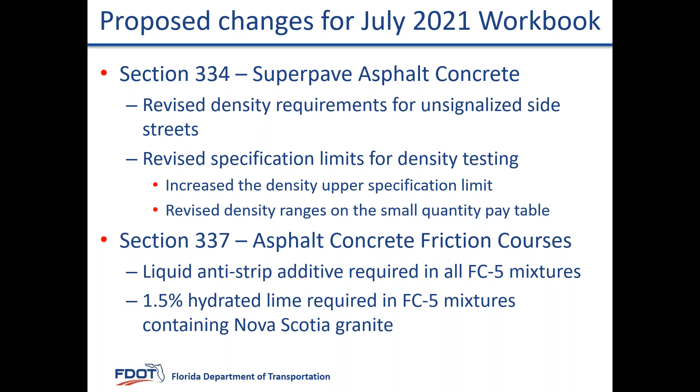A really good study done by NCAT showed potential for increasing or requiring liquid anti-strip, and also increasing the amount of required hydrated lime for the Nova Scotia granite mixes. So that spec change is out there—I'll talk more about that in about 20 or 25 minutes though. Just know that's out there.

And that's all I have for now. Are there any questions?

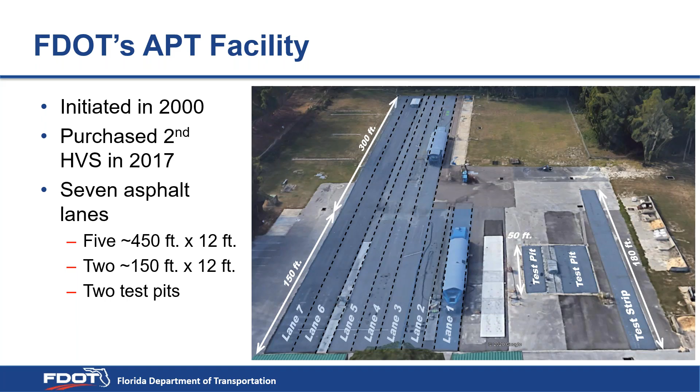So when we do an HVS test or an APT test, typically we're focused on a rutting comparison or a cracking study. And we do both of those differently with our HVS.

For the HVS rutting protocol, we raise the temperature of the pavement. We have a heater system inside that environmental chamber, you kind of see those white panels. We enclose the whole HVS undercarriage and heat it up to 50 degrees Celsius. Then we use a super single tire loaded to 9 kips, and we use a 4-inch wheel wander. We actually apply about 10,000 passes of that wheel every day, and we accelerate the damage by using a super single tire and then reducing the wheel wander to just 4 inches.

When we're looking at different cracking studies, we have to do a little more work. In this case, we typically precondition the pavement. One drawback of APT is that we try to perform these tests very quickly relative to the field. We pave, and within 2 or 3 years we're done with HVS testing. But to really get cracking in the field, there's a lot of aging involved. We typically see cracks initiate on field sections after 5 to 7 years, due to aging and oxidation of the binder. So we've developed a method to precondition the pavement, called an accelerated pavement aging system.

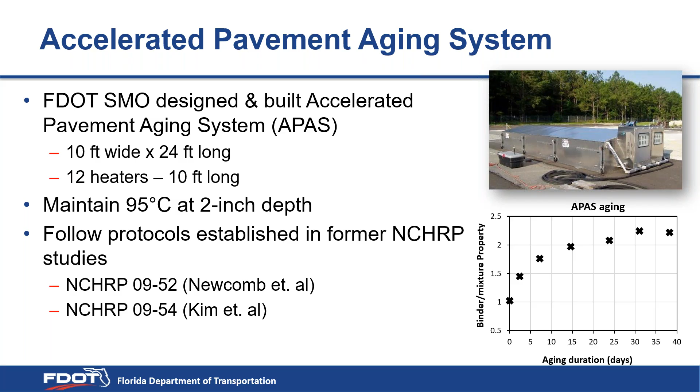This is our accelerated pavement aging system. It's basically a big box, 10 foot wide by 24 foot long, with 12 heaters. As I mentioned, we heat the pavement up to 95 degrees Celsius. Following protocols from former NCHRP studies, we developed a methodology to relate this accelerated aging to what we'd get in the real world, and that's where we arrive at 40 days—giving roughly 5 to 7 years of real-world aging.

I'm going to talk about some of the current HVS experiments we have planned. This is HVS 10, our 10th round of HVS experiments. We have 5 studies planned. We just milled and paved the tracks in June 2020, so we don't have a lot of data yet, but I'll go over each experiment and what we're planning to get out of them. Also, we're awaiting material to complete 2 of the studies, which I'll mention as we get to those.

The first experiment is a comparison of a 9.5 millimeter versus a 12.5 millimeter mix. Most people know there are limitations on when and where you can use a 9.5 millimeter mix—it's limited to the top 2 structural layers, 2 layers max, and can't be used in traffic level D and E applications. We feel these restrictions may place unnecessary design and construction limitations. The objective is to compare performance of an SP 12.5 and an SP 9.5 mix, both in rutting and cracking. If the performances are comparable, there will likely be changes to that 334 spec.

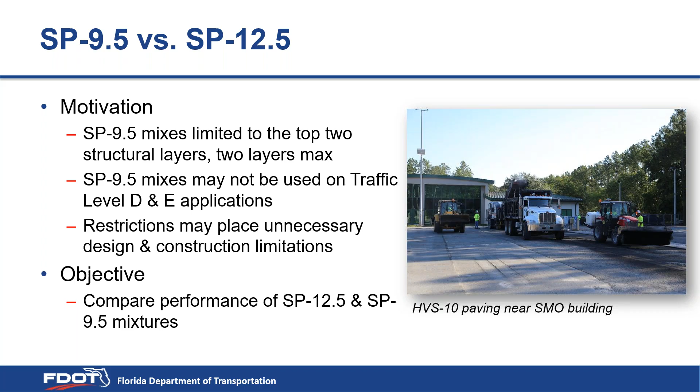In addition to the scabs, we had some sections with vibratory compaction and some with just static compaction. What we're trying to do is look at how that affects the bond condition of the asphalt pavement, and how that bond then affects performance.

After we milled the surface and left some scabs behind, we went and mapped out where all those scabs were. When we put an overlay on top, we came back and cut lots of cores where we knew there was scabbing and where there wasn't, so we could evaluate that bond condition.

Another thing we're looking at is a thick lift study. Sections with full depth cracking require a deep mill and fill, so this would give us a tool to accelerate rehabilitation.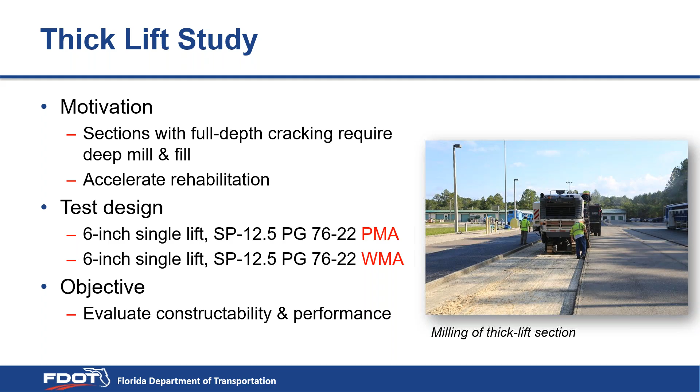To evaluate constructability, we measured the cooling rate. During construction, we placed thermocouples within the asphalt layer, at 1 inch below the surface, in the middle of that 6-inch lift, and at the bottom of the 6-inch lift.

We found that it took about 5 hours to cool down to 160 degrees Fahrenheit, maybe a little less near the surface. That's important information we'll need to keep in mind when we start to use this in the real world.

This experiment is actually something we've been focusing on, where most of our time has been spent in these first few months. We hope to get some information out soon and potentially get this implemented fairly quickly.

Another experiment we're looking at is the comparison of an Elvaloy binder with our standard, or gold standard, PG76-22 polymer modified asphalt with SBS modifier. This is really just an alternative binder modifier that we want to look at.

Binder production cost fluctuates, and we're always looking for better performing binders and mixes, so this is something we wanted to look at in this round of HVS experiments.

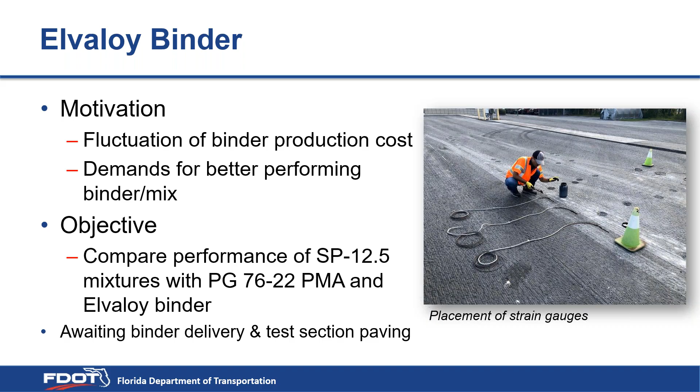The last HVS study I wanted to talk about is the low gyration study. Asphalt mixtures with lower design gyrations typically yield higher binder content, which potentially improves durability and performance, but there might be some trade-off with rutting performance. The main objective of this experiment is to compare the performance of mixtures with a design gyration of 100 and a design gyration of 50.

During construction, we found some problems with the volumetrics in one of the lanes with the lower gyration, so both us and the contractor agreed that that particular lane needed to come up. We're going to replace that lane when the Elvaloy binder is back in play, and pave both of those lanes. So those are all of the HVS studies we'll be working on this year, or probably over the next two-year period.

This is really my last slide, but I wanted to bring up a contracted research effort. The point of this research is to try to develop a method to automate raveling detection. As mentioned earlier regarding our pavement condition survey, our cracking survey includes both cracking and raveling, and right now that's the only visual assessment we use for our pavement condition survey.

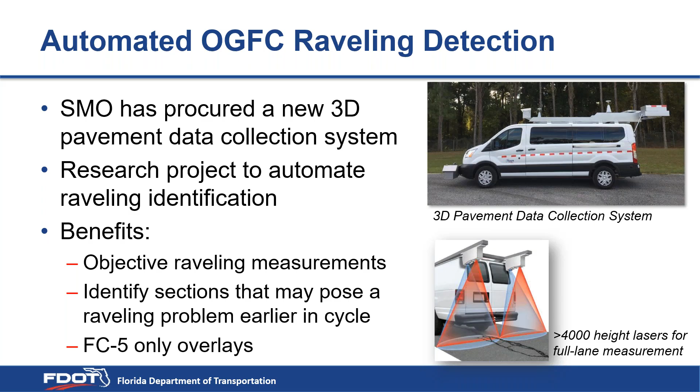So that wraps up my presentation, Mark. If there are any questions, I'm happy to answer any questions that there might be.

Yeah, we have one. Can you describe... the department does a lot of very impressive research. What's the process to decide which projects are researched?

Yeah, so we have a process that we go through every year. What we do is generate research ideas from our districts, and we also try to reach out to industry. I think I might have reached out to you earlier in the year, Mark, and if not, since you're new in that position, you're welcome to contact me or Howie or any of us if you have research ideas.

Generally every fall we try to generate these research projects, and then as a group we rate them and figure out which ones are best addressed by APT, accelerated pavement testing, which are best addressed by contracted research efforts, and which are best as a demonstration type project where we look at districts and figure out, hey, maybe this material or product doesn't necessarily need to be researched, but we need to demonstrate in a real field project how that was working. So we look at all three of those things as methods to implement research.

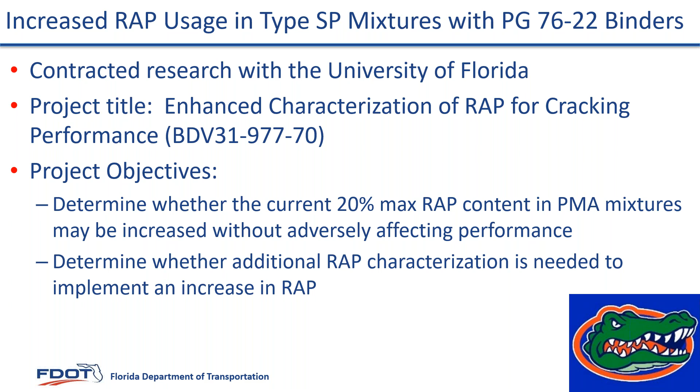It looked at RAP sources from across the state, and they did a lot of high-tech testing, stuff we can't even do in our lab in some cases. The goal was to do the high-tech testing and then make it simple. And UF, they hit a home run with that.

So they did interstitial component direct tension testing - I can barely say it, and I certainly can't tell you what it really is other than pulling apart asphalt in a dog bone shape. They also did some Superpave IDT testing to verify those results.

And they came out with some very simple characteristics: percent passing the number 16 sieve on the gradation of the RAP, and the high PG grade of the recovered binder from the RAP. Stuff we can do.

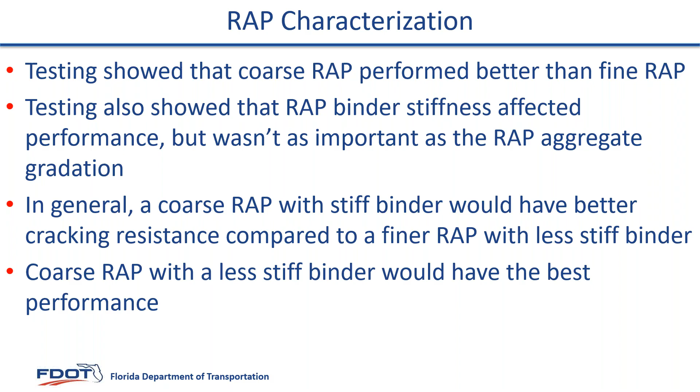So the testing showed coarse RAP performed better than fine RAP. Also, the stiffness of the RAP binder affected performance, but it wasn't quite as important as the gradation, surprisingly. So in general, a coarse RAP with stiff binder would have better cracking resistance compared to a finer RAP with less stiff binder. Again, that's all relative, but it emphasizes gradation of the RAP is important. We'll talk about why in a minute. Obviously, a coarse RAP with binder that's not too stiff would be the best.

All right, why is the gradation so important? Some of the RAP binder is going to stay on the RAP aggregate, and the finer portion of the RAP becomes part of the mortar in between the coarse aggregate skeleton in the mix. That's what affects the mixture's cracking resistance. Again, that's my very simple understanding - it's a lot more complicated than that. But basically, you want the stuff holding the coarse aggregate together to have less RAP binder in it, and that's going to lead to better cracking performance.

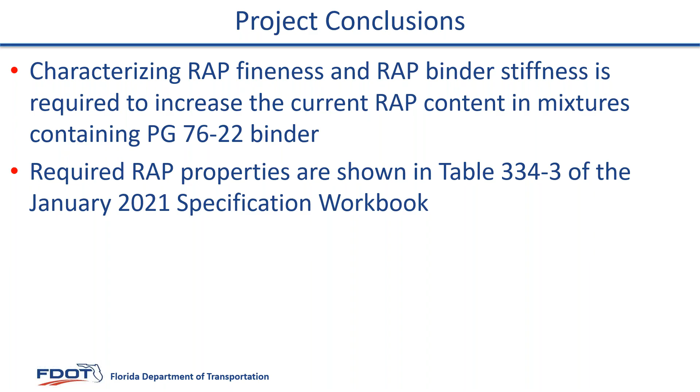So the project conclusions: you can characterize RAP fineness and RAP binder stiffness, and that's required to increase the current RAP content in mixtures containing 76-22 binder. So we can summarize that in the table that's out in the new spec. This is table 334-3 in the January 2021 spec.

Again, the way it'll work is you'll submit a sample of RAP to our office. We'll characterize it for you with respect to the high PG grade, and then it'll tell you how much RAP you can use in your mix designs. Anyway, I'm excited about that spec change and looking forward to getting it implemented.

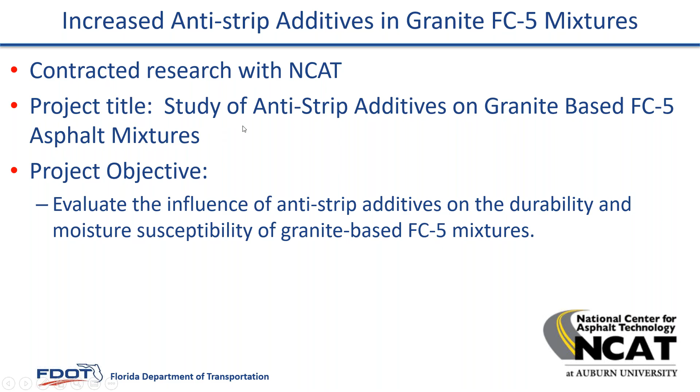The project variables: we looked at both Georgia granite and Nova Scotia granite, and then we had four different dosages with respect to anti-strips. The current standard for Georgia granite FC5s is 1% hydrated lime, which was the control. Then we added the liquid anti-strip. We also looked at just increasing the hydrated lime without adding the anti-strip. And then NCAT finally looked at the most extreme case with more lime and liquid anti-strip.

The testing conditioned the specimens using the asphalt pavement weathering system, which simulates long-term exposure to water infiltration, vapor diffusion, and thermal and ultraviolet oxidation. So you've got the UV lights and this weathering station with water being cycled through, trying to simulate what an FC5 mix goes through long-term.

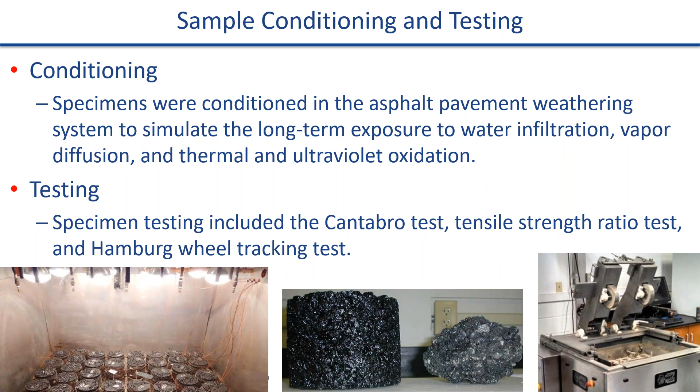They ran three performance tests: Cantabro, tensile strength ratio, and Hamburg wheel tracking. The conclusions were for the Georgia granite mixtures, 1% hydrated lime with the liquid anti-strip had the best performance and the best cost-benefit ratio. For Nova Scotia granite, more lime and liquid anti-strip was the best. This is a proposed change to the July 2021 workbook to incorporate these findings into the spec.

Next project, again guys, trying to stay on track. You heard Buzz talk about aramid fibers. We have looked at these in the lab for a while now, going back as far as 2013. We've done multiple studies, but we've not really done field sections.

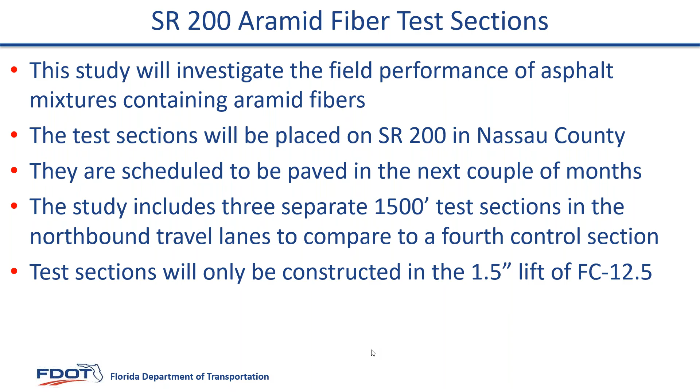So that's my slides here. The control sections, the standard in North Florida, is an FC 12.5. It's going to be granite, obviously, 7622 binder, and since it's granite, there'll be 20% RAP.

The first test section is to see, look, can the aramid fibers perform as well as the polymer modified binder. Since that's a 20% RAP mix, our specs say use a 5822 binder. That will be test section number 1.

The same job mix formula. They put the aramid fibers in, and then the 5822 binder. Test section number 2 will be the same as the control, but we'll add aramid fibers. Again, do we see even more improvement by using both polymer modified binder and aramid fibers?

And then the ultimate test section number 3 is we're going to put a section of high polymer binder in there. We'll use the same aggregates, but obviously it's high polymer and a surface mix where there's not going to be any RAP, no aramid fibers.

And again, we've got a lot of little studies there. We're going to use the new razzle dazzle van that Jamie showed with the automatic crack and raveling detection, although the raveling is still to be worked out, but we're going to use those vans to monitor the long-term rutting, cracking, ride, and raveling on these sections. And then we'll do corresponding laboratory tests on plant-produced mix for each section as well.

All right, so the first project I want to spotlight briefly is, if you've ever looked at pavement closely, you get these little things in the picture called roadworms. They pop up little humps, and they affect the ride. You see them usually when the sun's low on the roadway.

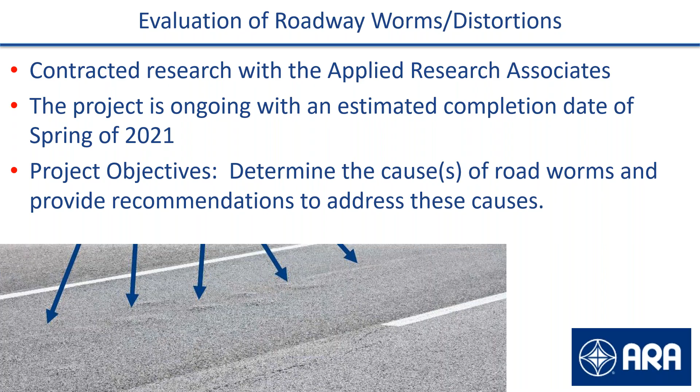Use of epoxy modified asphalt and FC5. Like I said earlier today, we're always looking at ways to improve FC5. This is kind of an outside the box thing, but it's a new technology that's being used in other countries. It's also been used on bridge decks, but we wanted to take a look at it. Is it something that may suit us or not?

So we've contracted out with NCAT to look at it. The project should be done next summer, but the idea is, could we use an epoxy modified asphalt binder to improve the performance of FC5? If it does, is it even cost effective? If that's the case, how would we design it? And is it recyclable as RAP in the future? So again, we want to explore that. If there's something we can do to improve the performance of our mixes, we want to take a look at that. So more to come. Look forward to giving you guys an update in probably 6 to 9 months on that project.

Performance of 9.5, 12.5, we're doing it at the HVS, but we also want to look at the cracking aspects. So TTI is looking at that for us. The idea is, if we can design the 9.5 mixes to be as good as the 12.5s with rutting, cracking, and durability, we need to open up our spec and let you guys use them. So that's the goal of that project. Estimated completion date is hopefully winter of next year. By then, we should have the HVS done, and we'll have the complete picture on that, both in the lab and in accelerated testing.

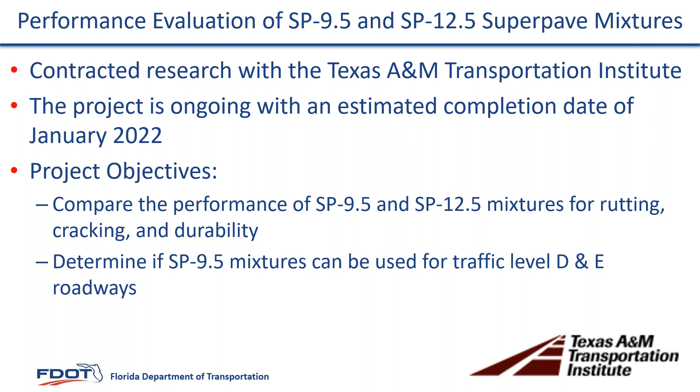Replacement of the ARMI layer. So again, you guys that have been in the business for a while, you remember the ARMI layer. Used to do a lot of it back 10, 20 years ago. It kind of died out for a number of reasons: mixed performance, the fact that it has no structural value, some of the constructability concerns. But reflective cracking is still an issue. It's our number one distress. Sometimes we don't have the budget to mill out all the cracking. Is there something we can do that combines the best benefits of an ARMI layer, but also a mix that would have structural value, be able to be opened up to traffic, that type of stuff.

UF did an initial project and had some promising results. We're doing a continuation project starting early next year to come up with practical guidelines on how to design these mixes. More to come, but we're pretty excited about that. We'd love to be able to better address reflective cracking effectively.

Resilient asphalt pavements - resiliency is kind of the new buzzword in transportation. In Florida, with high sea level rise and tropical storms dropping a lot of rain, sometimes we open up the roads even before the water's off. In coastal areas, we have roads that flood with the tides, but we still run traffic on them. Is there more we can do to improve the resiliency of the road and make it more resistant to flooding? This is a new study UF's going to kick off in the next couple of months, and we're excited about what they've got there.

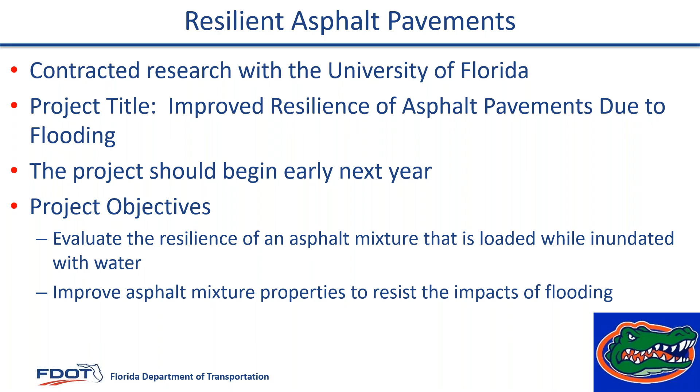This one was actually an industry concern. We put FC5 in a lot of places, and maybe some places where it's safe but doesn't last as long. We're talking about suburban corridors - 4, 6, 8-lane roadways with multiple signalized intersections, U-turns, midpoint U-turns, turn lanes - a lot of stopping and turning movements. Is there a better alternative? We know our dense graded friction courses are very durable, but they're not really good with respect to hydroplaning. Is there something in between FC5, maybe a finer open graded friction course or something else, that would have better durability but not compromise safety? That's a project that's going to advertise soon.

And with that, I've said enough. I'll take any questions.